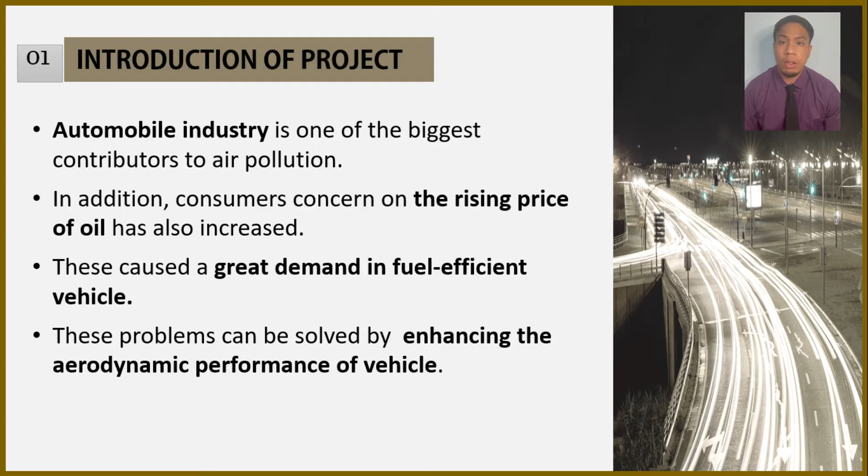Many researchers are interested in finding solutions to these problems. One of the famous ways is by enhancing the aerodynamic performance of vehicles. So what is automobile aerodynamics? Automobile aerodynamics is the ability of a vehicle to travel through air with minimal effort and better handling on the road. One of the techniques that can be applied to enhance aerodynamic performance is by reducing the drag.

Since 1973, automobile manufacturers have focused on drag reduction for two main reasons: one is to improve fuel economy, and the second is for driving comfort. This is because nearly half of the vehicle's energy is consumed due to aerodynamic drag. Drag is the force that opposes an object's motion through a fluid. Fluid can be in two forms: when it is gas, such as air, it is called aerodynamic drag or air resistance, whereas when it is liquid, such as water, it is called hydrodynamic drag.

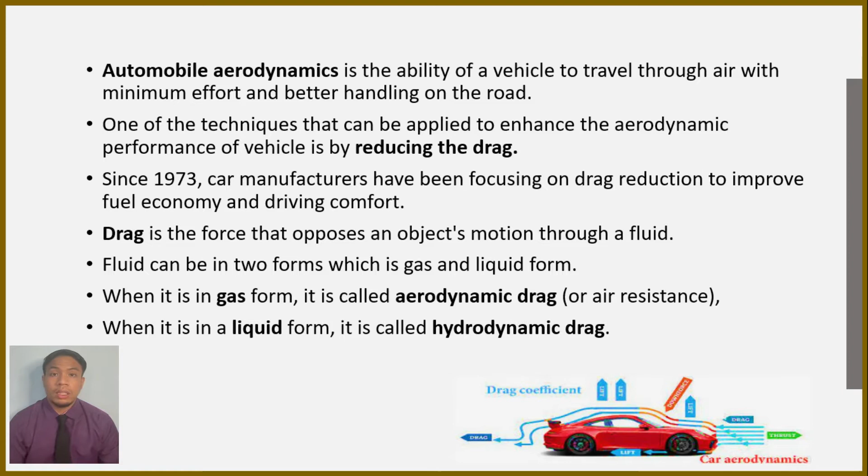One of the ways to reduce drag is by modifying vehicle surface to improve aerodynamics. Improvement and modification of vehicle surface can improve aerodynamics, so the drag force acting on the vehicle can be reduced, which contributes to better fuel economy.

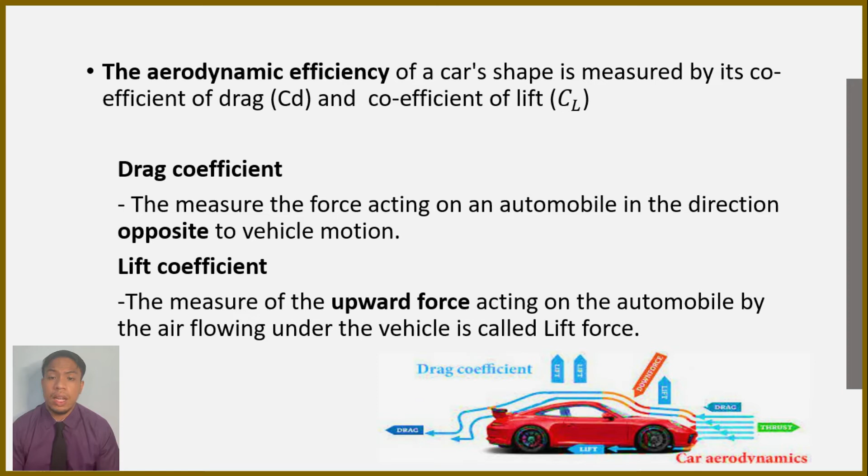The aerodynamic efficiency of a car's shape is measured by its coefficient of drag, CD, and coefficient of lift, CL. Drag coefficient is the measure of the force acting on an automobile in the direction opposite to vehicle motion. The pressure due to air hitting the front side of the car and the vacuum formed at the back side are the main causes of drag force. Lift coefficient is the measure of the upward force acting on the automobile by air flowing under the vehicle. This force is very dangerous and causes lifting of vehicle and loss of road grip.

One of the well-known strategies to reduce drag force is by modifying vehicle surface. Modifications can be done in many ways, and some proven ways are by modifying the exterior body of the vehicle and by installing add-on devices such as air dam, diffuser, vortex generator, spoiler, tire cover, and air ducts.

Another add-on device normally added to a car is the antenna. Car antenna is considered an essential automotive accessory due to its function to provide uninterrupted transmission of wireless signals and radio waves in the vehicle. Even though its size is smaller compared to other add-on devices, its impact on the aerodynamic performance of the car should not be negligible because it is placed on the exterior body of the car.

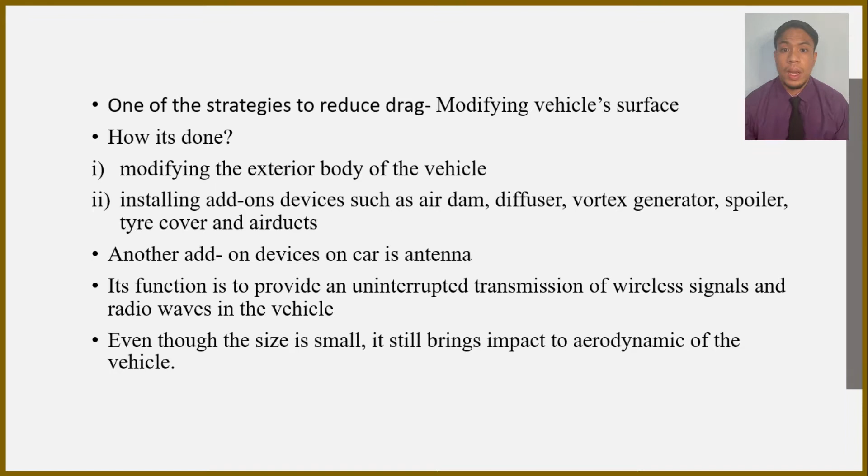Let's move to the next section, which is problem statement. These are the problems and issues happening now. The first is the high price of oil. The second is the global warming issue, which is getting worse day by day. The third is the low fuel efficiency of vehicles, which are mostly available in current markets. And lastly, the demand for fuel efficient cars is getting higher.

The problems mentioned earlier can be solved by improving fuel efficiency, meaning less gas is required by a vehicle to travel a specific distance. This effort will not just solve the problem of high oil price due to less consumption of oil, but it can also help reduce global warming and provide a greener way to conserve the earth due to less pollution being produced.

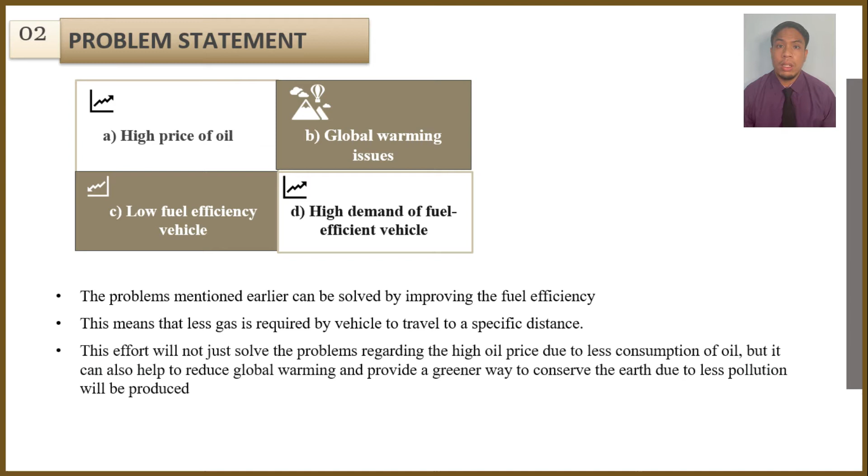So the objectives of this study are: firstly, to study the effect of using different types of antenna on the aerodynamic performance of a car. Next, to validate and compare the results of drag coefficient between the present study and car manufacturer database.

To determine the best type of antennas and airflow field during vehicle running, and to analyze the pressure counter and velocity field around three types of antennas, and determine the critical length which optimizes drag coefficient results.

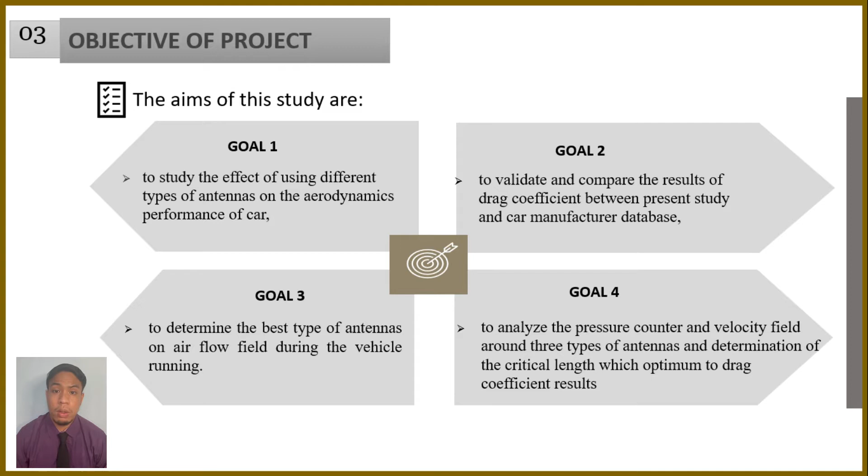Next, let's see the scope of the study. This study will focus on analyzing pressure and velocity of the specimen model, which is BMW 320i, when different types of antenna are used.

The three different antennas that will be used are the carbon fiber shark fin antenna, the short premium rubber antenna, and the stainless steel universal antenna.

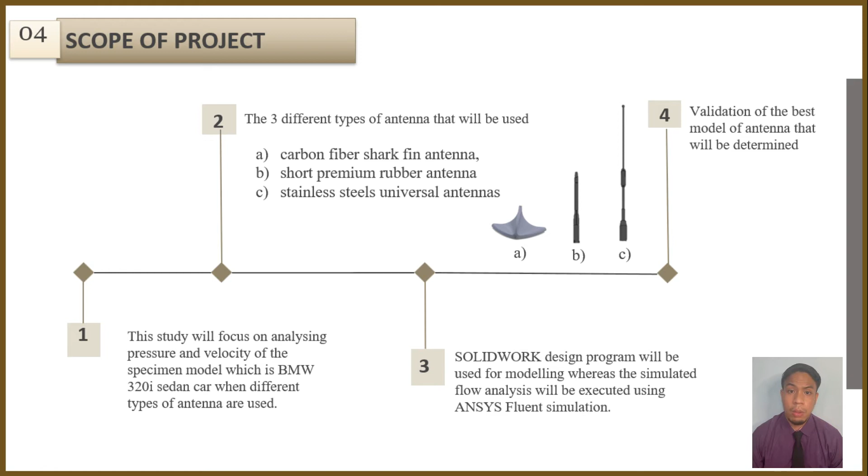SolidWorks design program will be used for modeling, whereas the simulated flow analysis will be executed using ANSYS Fluent simulation. Lastly, validation of the best model of antennas will be determined.

Let's move forward to the literature review section. Here I will present several studies done previously in this area of research regarding factors that can influence aerodynamic drag reduction.

The first factor is the modification of the exterior body of the vehicle. Some research done includes modifying the underbody, frontal area, and simplifying the car model.

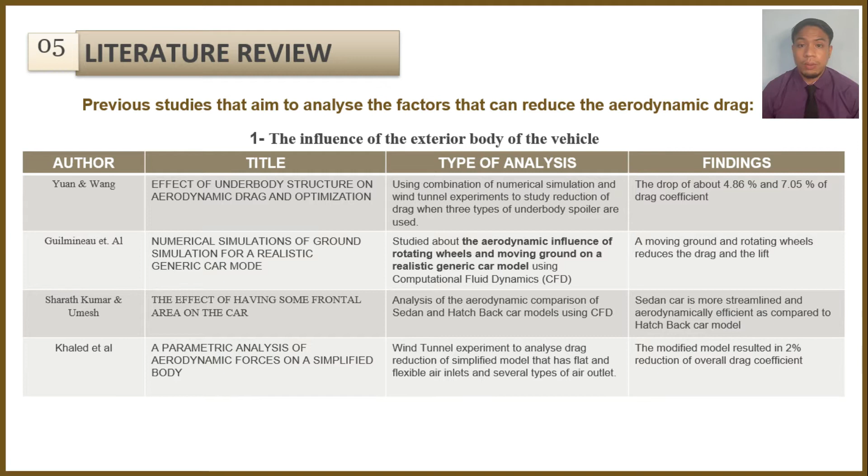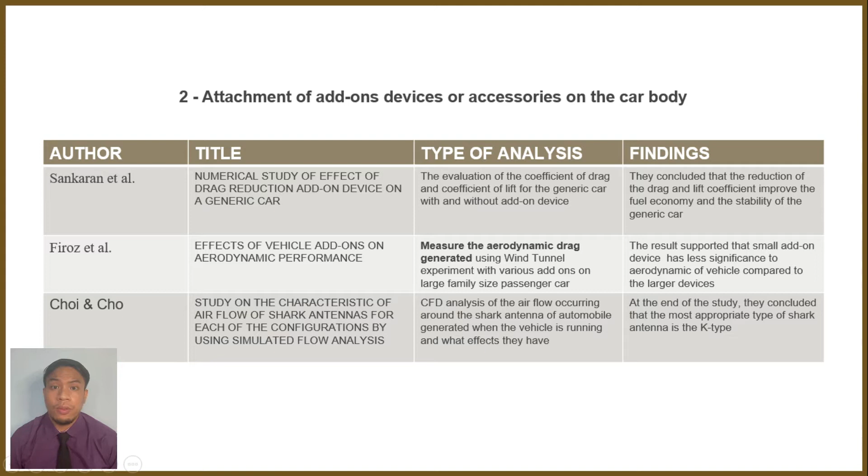After that, I started doing my research with 3D modeling of the car model and antennas. Then, the analysis was done using CFD.

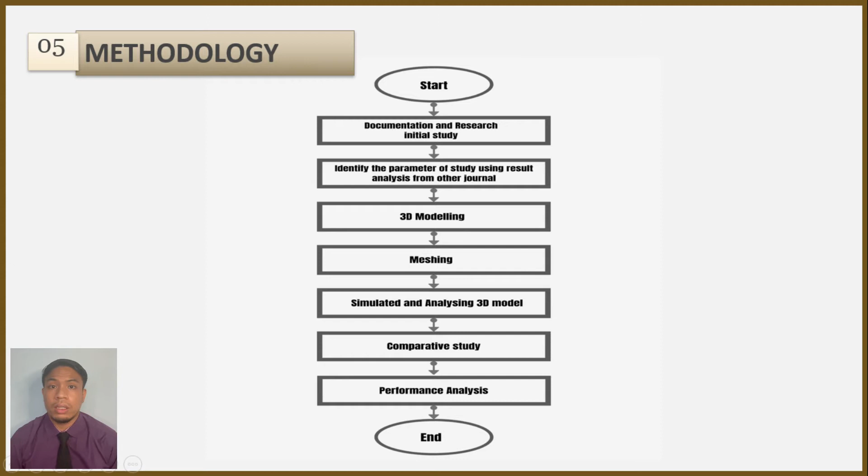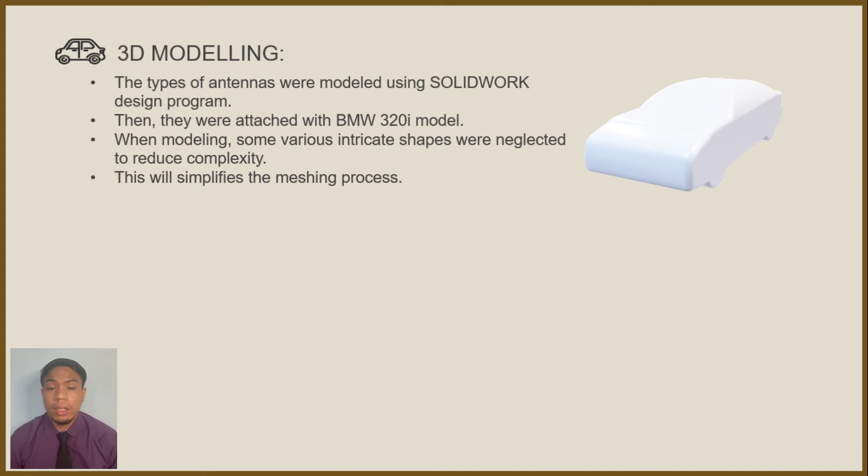For 3D modeling, SolidWorks program was used to design the three types of antenna, which are universal antenna, short rubber antenna, and shark fin antenna. Then, they were attached to the BMW 320i model.

When modeling, some various intricate shapes were neglected to reduce complexity. This simplifies the meshing process.

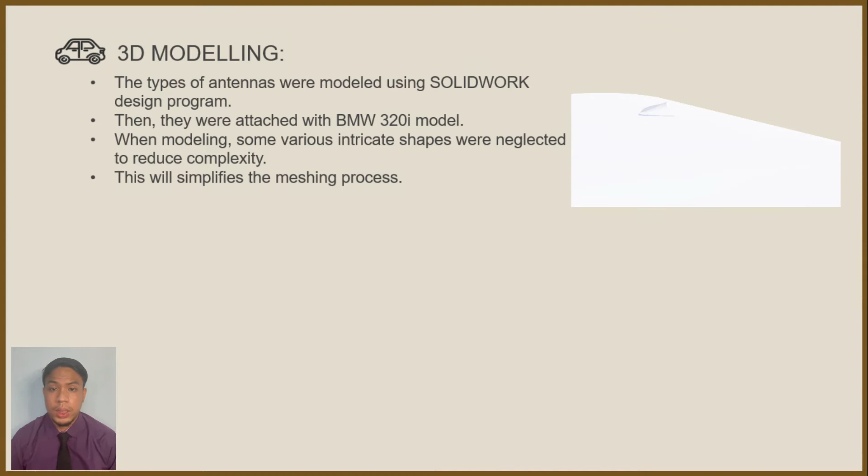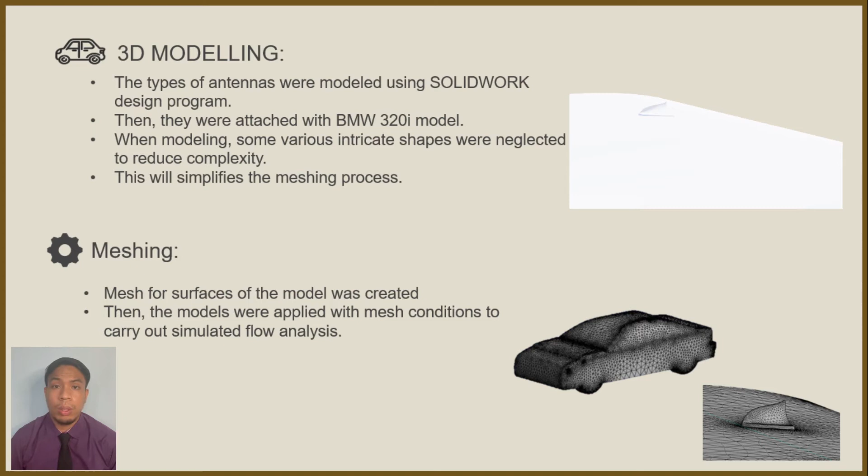The next step is mesh generation, which is the process of subdivision of the domain into a number of small domains. The models were applied with mesh conditions to carry out simulated flow analysis.

Then, define the boundary conditions and run simulation for the three antennas. After meshing, flow parameters such as turbulence model and velocity inlet of fluid were applied.

The specimen model was applied with similar boundary conditions with the same velocity of airflow set as inlet conditions, in order to observe the airflow that occurs while the vehicle is running. The table shows the properties and values of input and output boundary parameters.

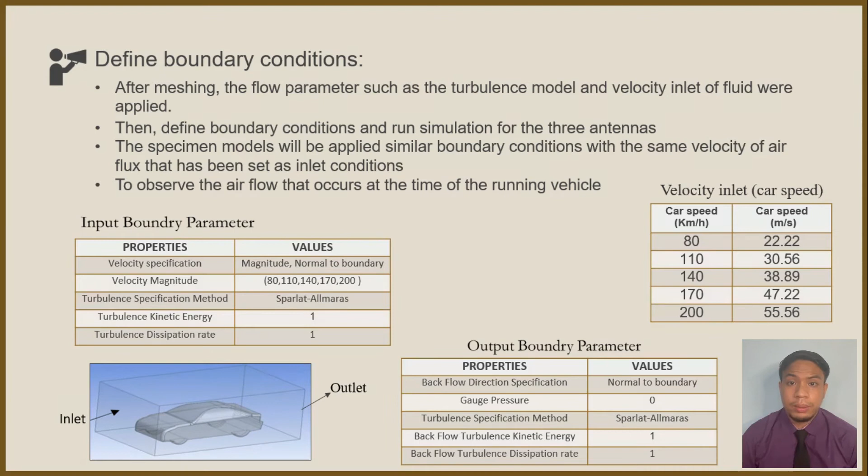In the result and discussion part, the result has been analyzed based on the pressure and velocity around the car antennas, in order to determine the best antenna that has better airflow with minimum separation flow around it.

The sequence for this section is as follows: it starts with CFD analysis, next the data were validated, then the data were presented in graphical representation, and finally the comparison of analysis results were made.

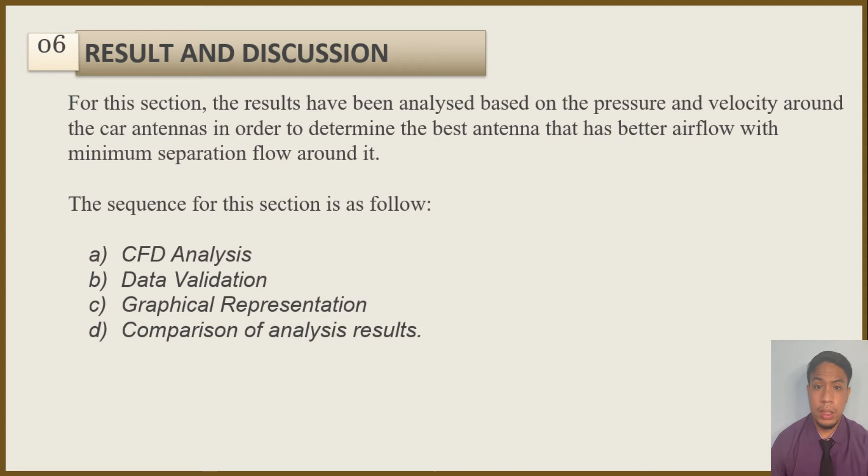In CFD analysis, ANSYS Fluent software was used to study the airflow around the antennas. Four types of parameters were studied, which are pressure, velocity, drag, and lift coefficient. These are examples of the simulation results obtained from ANSYS.

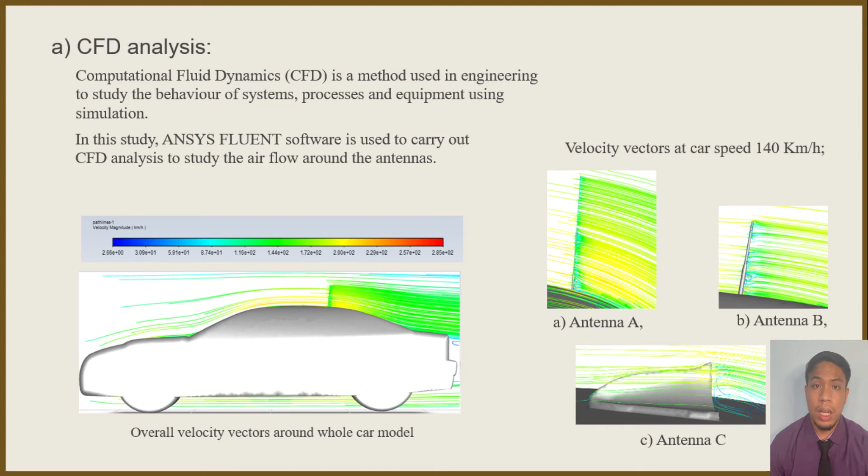This is the overall velocity vectors around the whole car, and these are the velocity vectors around the three types of antennas at 140 km per hour. Antenna A is the universal antenna, antenna B is the short rubber antenna, and antenna C is the shark fin antenna. These are examples of results in pressure contours of the car model and antenna.

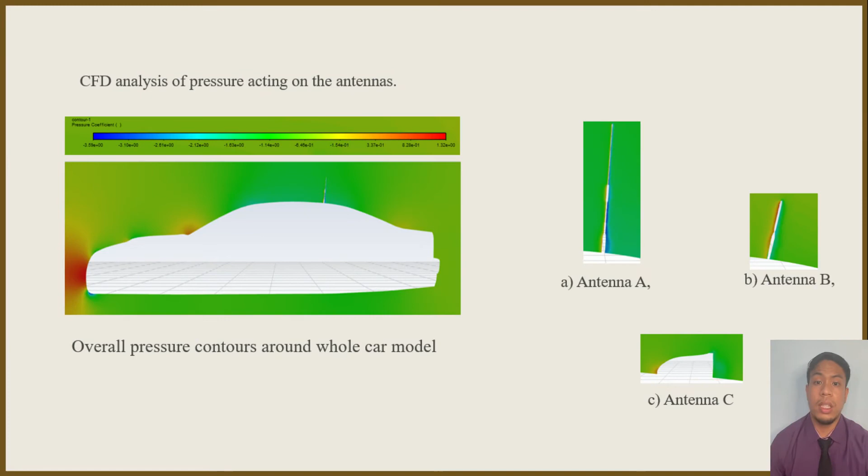The next step is data validation. After simulating the case, the result of drag coefficient for the base model was compared and validated with the true value of CD given by the car manufacturer of the model used, the BMW 320i.

The difference of the CD values are illustrated in the bar chart as shown. The blue one is from the car manufacturer and the red one is from CFD simulation.

The validation was done by calculating the percentage difference between the value obtained from simulation and the manufacturer value. This is the formula used. The calculated percentage is 3.8%.

Thus, it can be validated that the value of drag coefficient obtained for the base model in this experiment is acceptable because the value is less than 10%.

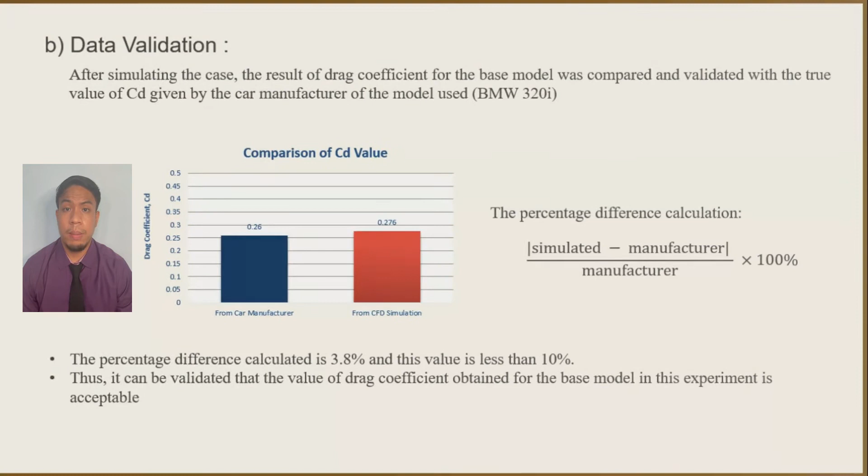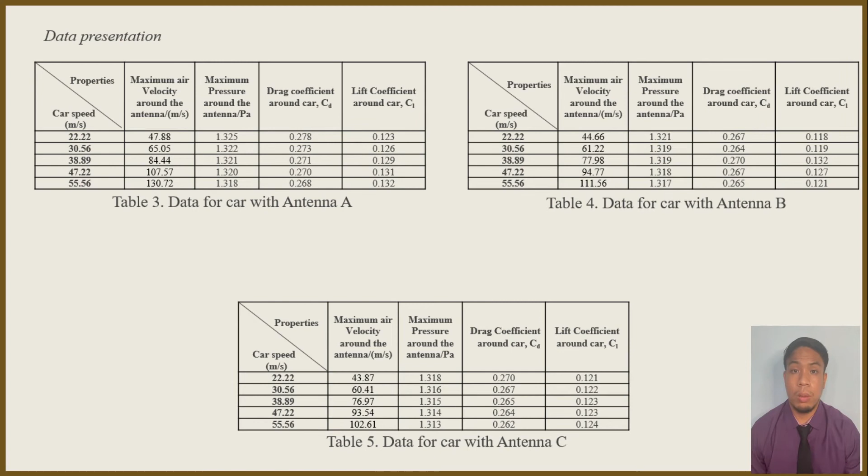Next, the data of the analysis are tabulated as shown in the slide. The analysis was made with various car speeds for every property. The properties of analysis are maximum air velocity, maximum pressure around the antenna, drag coefficient around car, and lift coefficient around car. Then, the data were presented in graph to see the trend of each property.

For the relationship between velocity of car and car speed of three types of antennas, similar trends are shown by all three antennas, which are increasing velocity of car as the car speed increase.

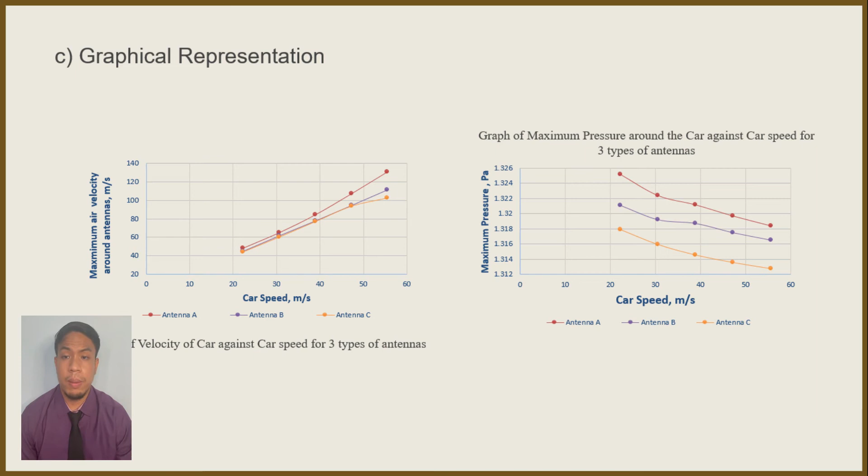Next, for the relationship between drag coefficient and car speed, for antenna A and C, the drag decreases as the car speed increases. Thus, drag force is inversely proportional to car speed. However, for antenna B, the CD starts to have a huge rise after 30.56 meters per second and decreases after 38.89 meters per second.

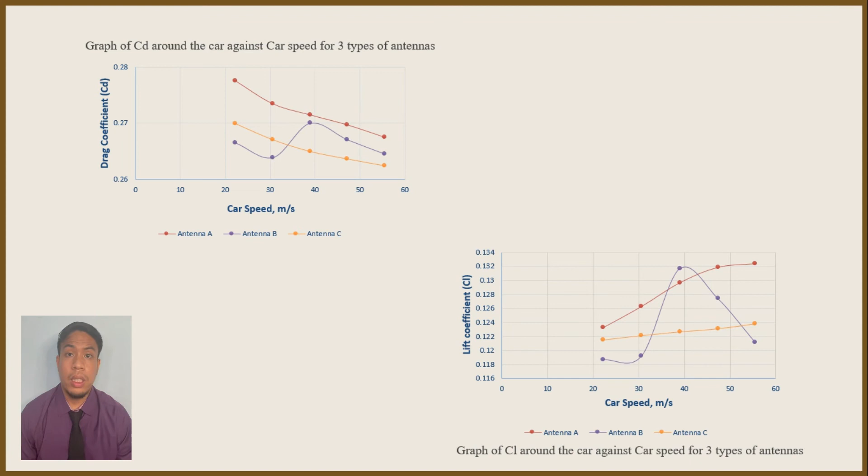Lastly, for the relationship between lift coefficient and car speed, for antenna A and C, they exhibit the same trend, which is increasing lift coefficient as the magnitude of velocity increases. Thus, lift coefficient is directly proportional to magnitude of car speed. As contrast, for antenna B, the lift coefficient increases until it reached the maximum and drops back after 38.89 meters per second. The last part in results is the comparison of analysis data.

The car with antenna C, which is shark fin antenna, showed the lowest value of maximum velocity and pressure compared to other antennas. In addition, car with antenna C has shown the lowest value in drag coefficient. Apart from that, as for lift coefficient, the lower value is shown by antenna B.

The low value of drag and lift coefficient reflects the high performance of car movement due to the reduction of resistance against air. So, antenna C exhibits lower values in all comparison items applied in the analysis, including maximum pressure, distribution area of high pressure, maximum velocity, as well as drag coefficient.

Even though it does not show the lowest value for lift coefficient, shark fin antenna is still chosen as the best antenna due to the consistent trend shown in the relationship between lift coefficient and velocity.

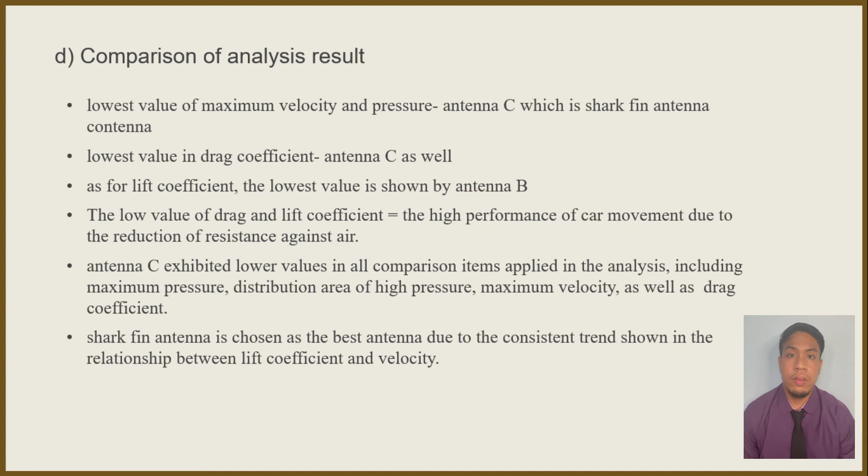Now, we are moving to the conclusion of the study. In this study, the simulated airflow analysis around BMW 320i car model with three different types of attached antennas,

which are universal, shark fin, and short rubber antennas, were executed and analyzed using ANSYS Fluent simulation. The conclusions were made based on 5 comparison items, which are maximum pressure, distribution area of high pressure, maximum velocity, and lift and drag coefficient.

It was concluded that the most appropriate antenna for the BMW 320i model is shark fin antenna because it results in lower value of all comparison items as stated earlier. Thus, shark fin antenna has the best aerodynamic efficiency among those studied.

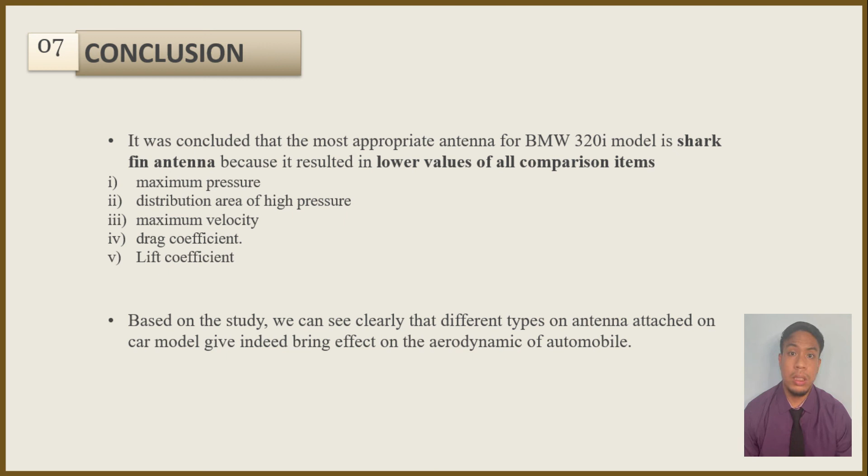Based on the study, we can see clearly that different types of antenna attached on the car model give a little effect on the aerodynamics of the automobile. Therefore, we could not completely ignore this small component, even though it brings only slight change and effects on the aerodynamic performance. Last but not least, there are recommendations that can be done to get better results for this study.

Firstly, to verify all the simulated results from the computer models, more realistic conditions must be used. This could be achieved by performing physical wind tunnel tests.

In addition, a verification of the results can also be done by performing an asymptotic solution. This means that the same case should be simulated using a different size computational grid and different turbulence model such as K-omega or LES. If the results do not differ between the different setups of the same case, an asymptotic solution is achieved.